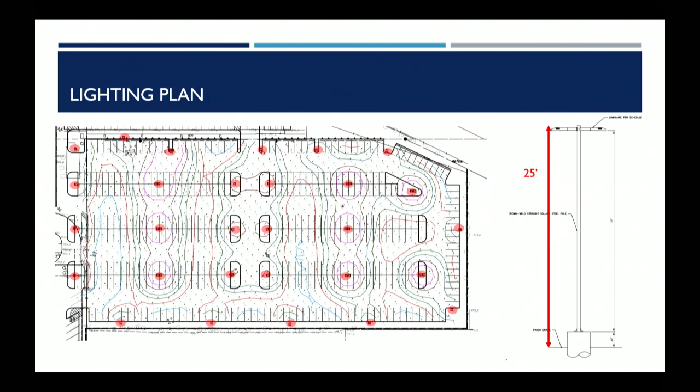As far as the environmental review and determination is concerned, the project is exempt from the California Environmental Quality Act, Section 15182, because the project is consistent with an approved specific plan.

SOMAS prepared the CEQA Consistency Evaluation Memorandum, which is included as an attachment to the staff report. This concludes that the project is consistent with the specific plan and that there are no impacts beyond what was evaluated in the certified final program environmental impact report. SOMAS is available for questions if the Planning Commission has questions regarding the environmental report that was prepared.

As far as legal noticing is concerned, public hearing notices were sent out to 463 owners and occupants of properties within 300 feet of the project site as required by state law. This notice was also published in the newspaper and posted on the city's website.

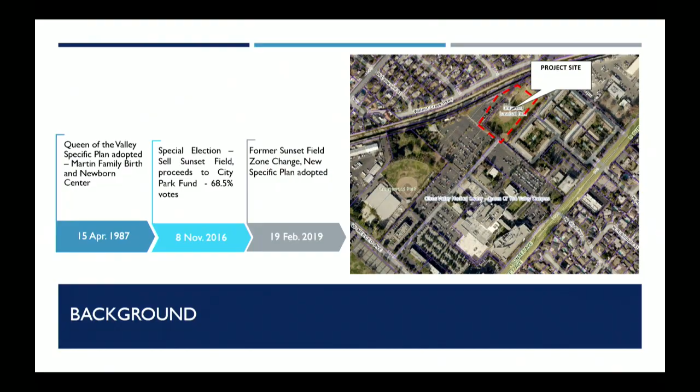So for this parking lot plan, for now, you have not done any outreach to the residents besides this meeting?

That is correct, we have not done any outreach. The intent was that this was the initial phase. We were trying to get our plans together a few months ago, and considering when we went to council a year ago, we felt that a year out in early November is a good time to update on all the components before construction begins on the parking lot. As well, as the other components of the medical office building and the addition are brought forward, we're reaching out to those neighbors prior to those items coming before the commission.

Thank you. Chair, if I may, we did send out notification to the ownership of Torrey Pines and the residents of Torrey Pines as well.

Thank you, if I may just add one thing. When this project was first in its proposal stage, they did reach out. They had a meeting at the Queen of the Valley site in one of their smaller conference rooms. We introduced this project, and the Torrey Pines people and other neighbors were in attendance. That's where the original introductions were made to the affected people. They were there, so as far as I know, this is not something that's just dropping on their laps. They were there, and they're well aware this project is happening, and they saw the phasing that was presented that night. So they're in the loop.

I'd also like to go back to the plan. Joanne, can you pull out the plan of the parking lot only? So on the east side, where the red lines are drawn, on the east and north side of the parking lot, there's a 10-foot stretch, because currently the only neighbors are just across from that particular area. Is there any way you can plant more trees along those sides?

And do you guys have a photo sim so that we can take a look at to see what it looks like?

The first part of the question I heard was about planting additional trees, and the second part was about simulations. Is that what I understood? So where I'm getting at right now is that the current neighbors, the apartment units or Torrey Pine apartment tenants, are used to seeing a park.

And now that there's a parking lot with lights, maybe the trees along that side can block some of the light coming through, because I believe the hours for the parking lot are 24/7.

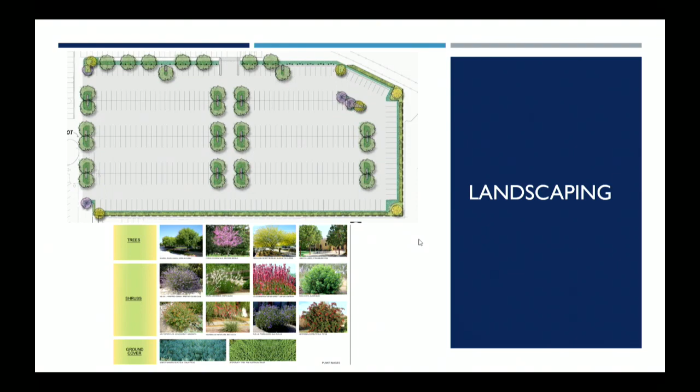Yes, and definitely we could. The intent was to plant shrubs there, but we can definitely add trees along that buffer. We don't have any photo simulations we can offer. However, there are a considerable number of trees, one of them shown in the picture Joanne presented as part of the overall presentation. There's a significant tree boundary that existed on both the park site and the Torrey Pine site, and those trees on the Torrey Pine site will be remaining, so a number of those existing trees will be remaining.

Can you pull out the tree? Those trees, will they be remaining, or will they be removed?

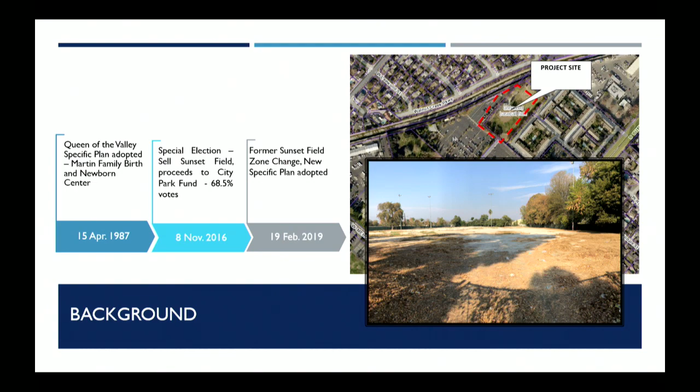If I may, John, can you see the photograph on the screen? I'm looking at it combined with the site plan, and along the site plan it does call out roughly 8 trees that exist along the northeastern, shorter property line that will be remaining, as well as probably nearly a dozen or so trees along the long property line that will also remain.

Thank you. Thank you.

Yeah, if I may, Chair, the area along here calls out existing trees to remain, and also along this area as well.

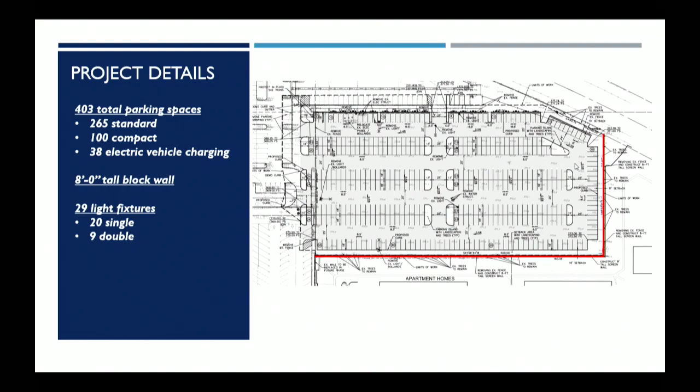Do we have any other questions? If not, we're going to close the public hearing. Does anyone else want to speak on this item? Those opposed? Anyone here? Do we have anyone on Zoom? One phone call, Joanne? It does not seem like anybody else on Zoom would like to speak. They're just available for questions.

Okay, thank you. So we're going to close the public hearing and open commission discussion. Well, as we discussed during the presentation, this is really the starting point of the specific plan when we adopted a specific plan for this project. So I think it's a parking lot, and it's the first phase, so I have no problem with it. We've got to start it off, and I'll make a motion to approve it.

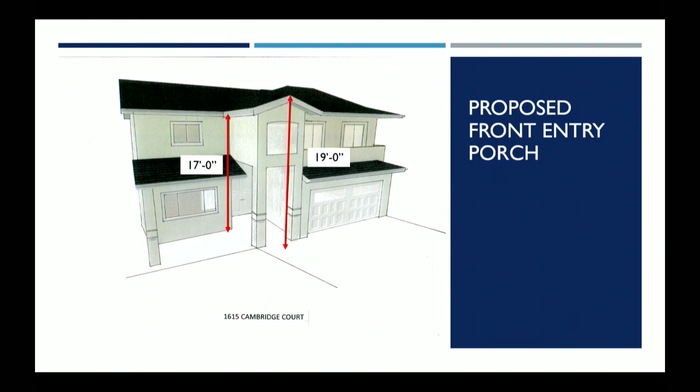Chair, Commission, I'm Jay Summers. I'm the applicant and the designer of the project. I was addressing basically that it is an extension of the height, but at the same time, I don't feel that the mass is really there because of the way that it's open.

I think it's opened up in the front and on the sides, and then with the window on the top, the mass is really not there, and architecturally it's compatible with the house, with that structure, that style of the architecture of that particular model.

There's several different models, probably 6 different models in the neighborhood. It's a tract, and there's a wide range of architectural views, so it's not anything out of the ordinary for this particular model. There are 3 models, I believe, of this particular house on the street.

The residence across the street has a 1.5-story entry with a shed roof that's unique to itself. The owner really wanted just to open up the front, because if you looked at the first picture—could you show the first picture, Renee? Thank you. It's closed and it's kind of dark.

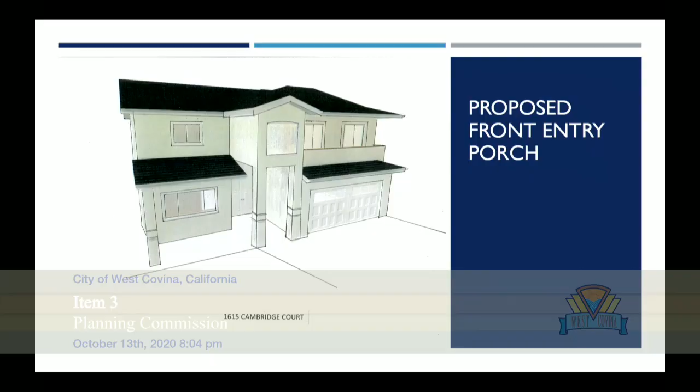Can you bring up the new design? Yeah, so that would be an incorporation of it.

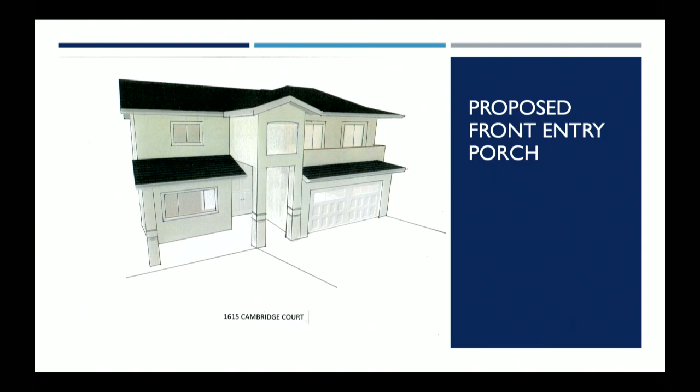We'd like to point out this wasn't particularly our first option. When we spoke to the homeowner, he wanted a roof line roughly in the middle of both the first and second story, but to our understanding it would not look symmetrical with the building itself. That's why we're presenting a front entryway on a two-story.

Just to point out, councilman and planning members, on that same block there are porch entryways that tie in and go all the way up to the second story. So there are a variety of roof designs. The designer, Jay, actually mentioned one other one, but I wanted to point out that second one.

Thank you. Thank you. Do you want to come back up again? Because we have a new commissioner here.

Give you the special one here. See if I can do a repeat performance.

I was reviewing basically the background from the design review meeting, and their issue was that it made too much mass. I felt that because it's really narrow, it does increase in height, but the mass really isn't there—it's open on the front and side, with a window on top.